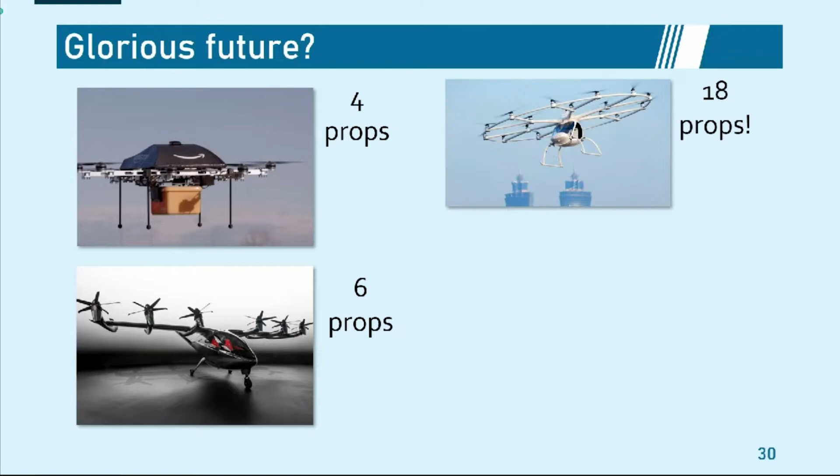And what's crazy is that was just one propeller. Imagine 4 of these on a delivery drone, 6 of these on an air taxi, or 18 of these on an air taxi, or 2 massive sets on a hybrid regional jet. Okay? Excuse the pun, but this is not going to fly.

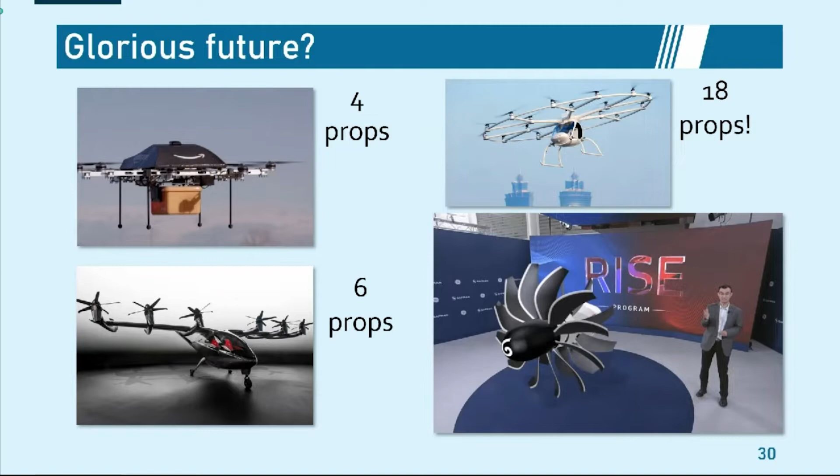People are not going to want these things buzzing over their neighborhoods. The military is not going to want to use them because the enemy will know you're coming from more than a mile away. And this may turn out to be a dud like the Concorde back in the 70s.

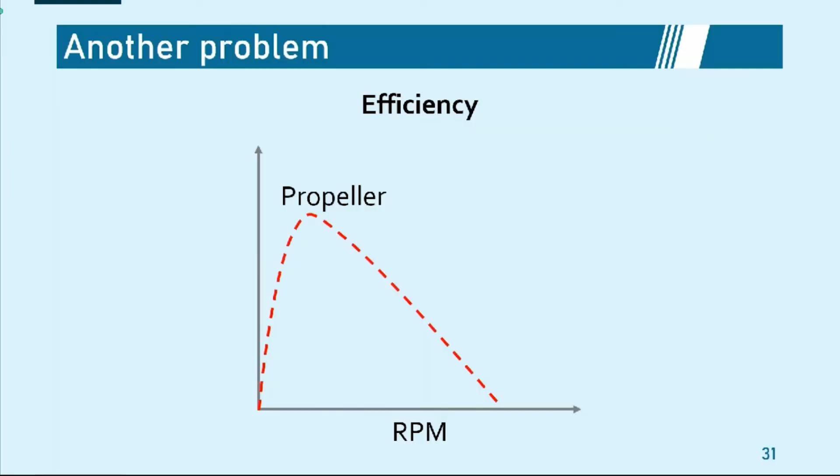Noise isn't the only problem. A propeller's efficiency peaks at low RPMs. At high RPMs, you get that very loud and irritating noise. And that's because the human ear has evolved to be very sensitive to high-frequency sounds like a baby crying or an animal screeching to come get you.

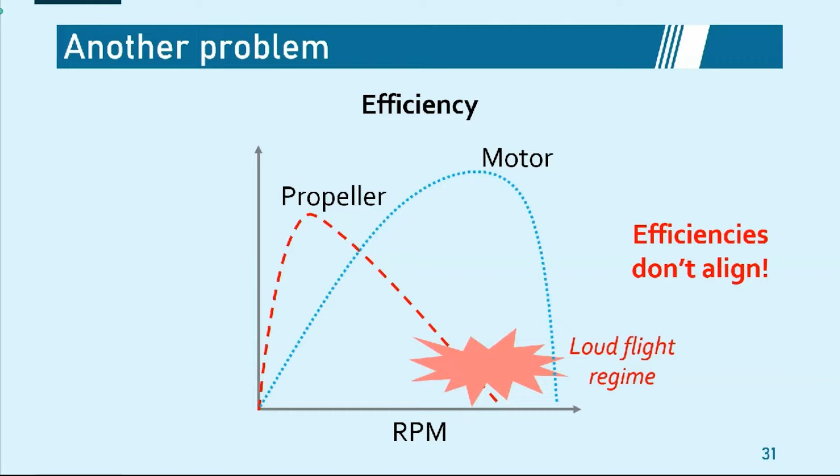Unfortunately, that is where electric motors are most efficient. So the peak efficiencies do not line up. And there's a second kind of double punch. Electric motors are most power dense - they put out the most power per unit weight at high RPMs. So even if you decided to take the efficiency hit and spin everything slowly to be quiet, you would have to massively oversize your motor to get the same amount of power. So it's a double whammy here.

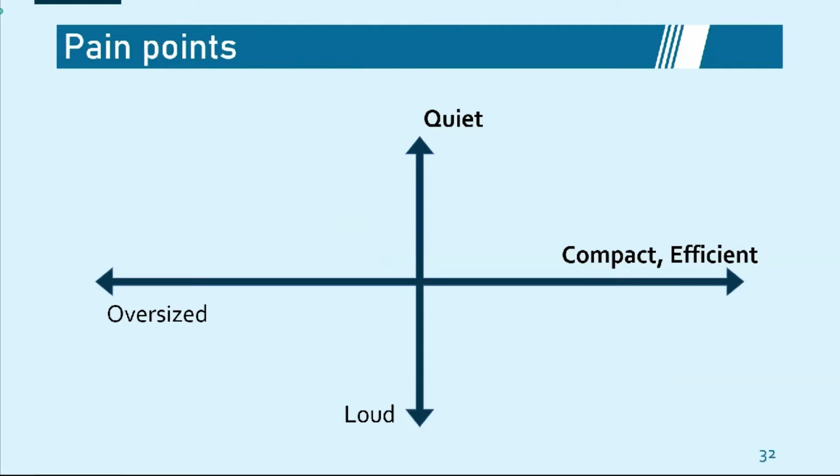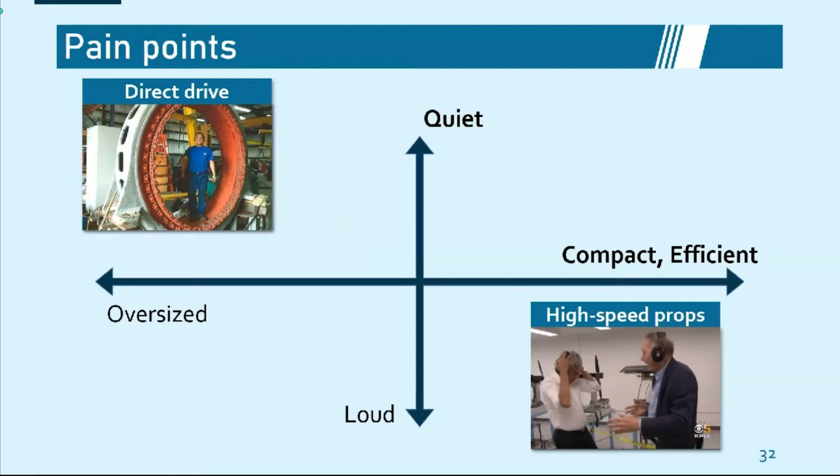So if we're looking at quietness on one axis and compactness and efficiency on the other - if you want it to be really quiet, you're going to have to suffer massive motors, and your plane may not even get off the ground. If you want to be compact and efficient, at least on the electric side, you're going to have to suffer high-speed propellers, like we just heard. If you throw in mechanical gears, you can be somewhere in the middle, but then you have an entirely new set of problems in terms of vibration and maintenance.

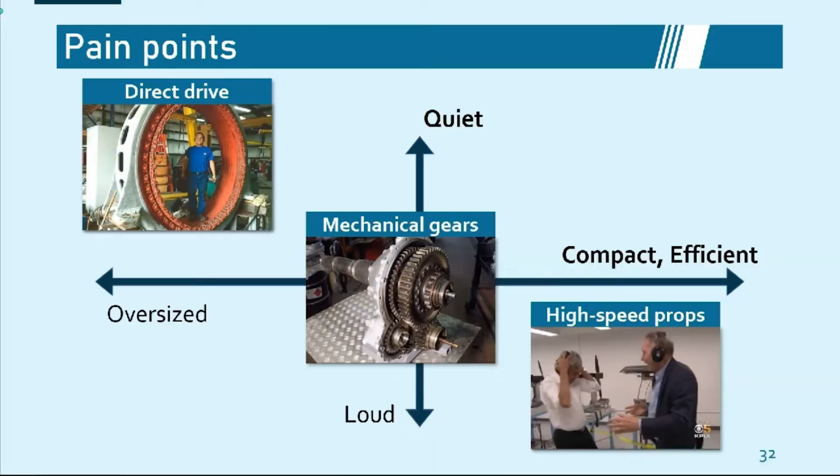So what are you going to do? You're going to buy Harmony's silent drive propellers, that's what, okay? The silent drive is an integrated propulsor that contains a quiet propeller, an innovative magnetic gear system, an electric motor, a motor controller, and a thermal management system to keep it all cool.

What does it do? It aligns those efficiency curves that I talked about at the peak operating point, all while avoiding that loud flight regime that we heard. And we're maintaining the compactness of a high-speed system with the reliability of a direct drive system. And it's an all-in-one system that you can slap onto a drone, an air taxi, or an even larger hybrid regional jet.

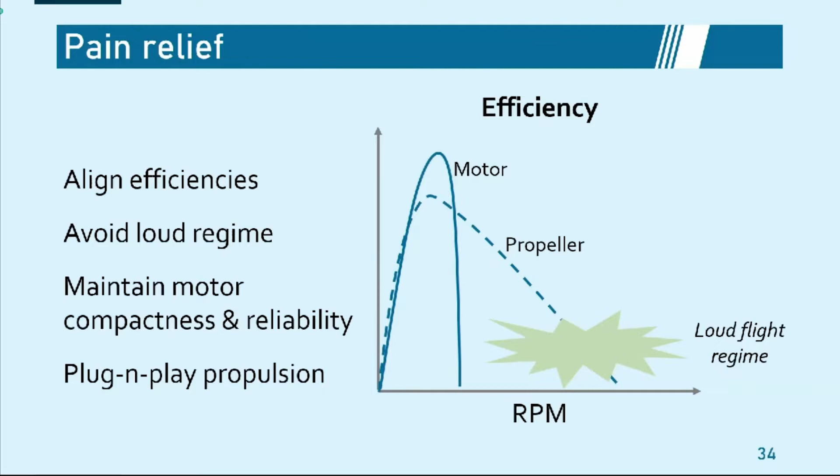What does that mean for the end user, for the customer?

An air taxi equipped with this will not wake up the neighbors when you fly in. It won't wake up your kids. A military system equipped with this technology will not alert the enemy that you're coming.

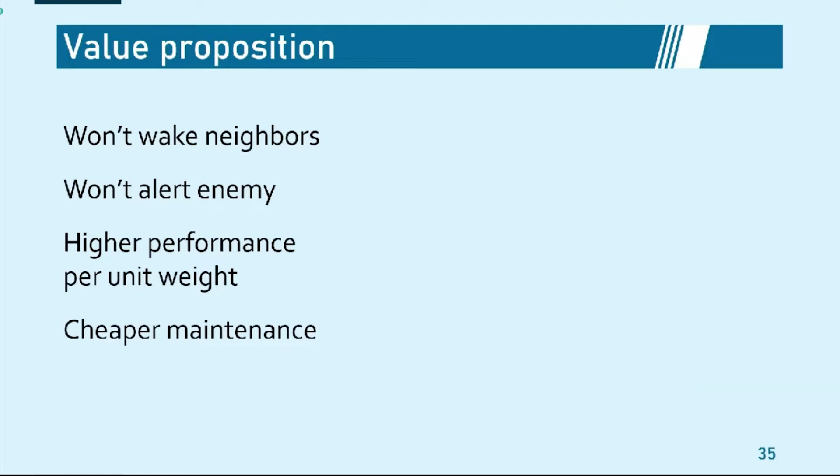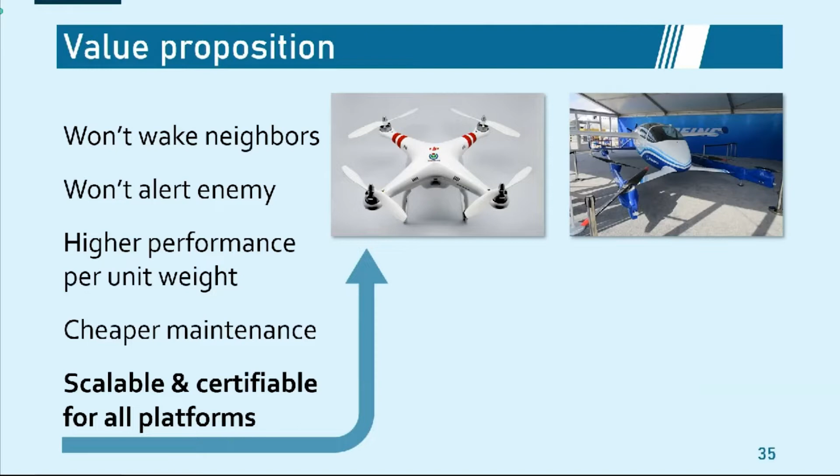We're squeezing more power per unit weight, which translates into longer range and higher endurance. And we're minimizing maintenance requirements while maximizing reliability, which translates into lower operating costs and a cheaper ticket for the consumer. What's great is that this is a scalable and certifiable solution for drones, air taxis, and even hybrid regional jets. How does some of this work?

First off, we have the quiet propeller. We've patented a very unique design with some special sauce that I can't really talk about. But what I can do is demonstrate the quietness.

First I'm going to play a clip of just a standard quadcopter drone that you may buy at Best Buy. And then I'm going to play a clip of our system equipped on a similarly sized drone.

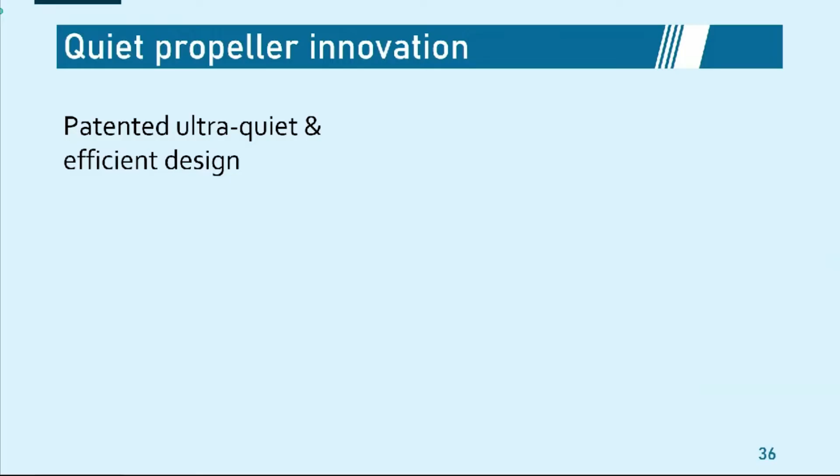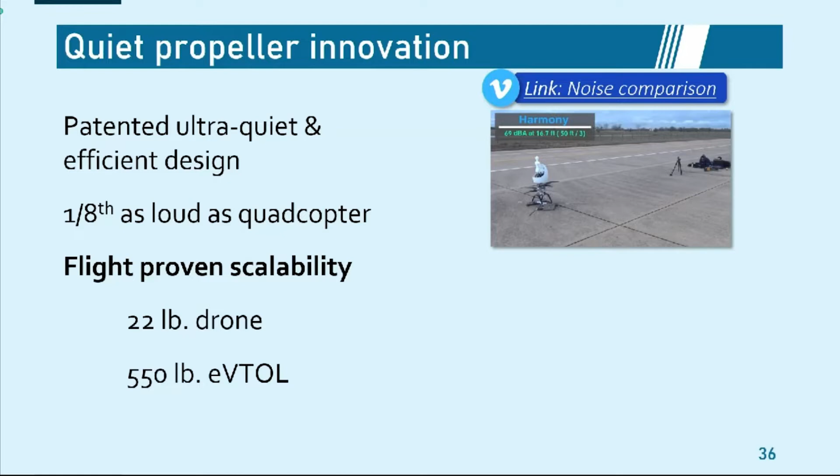It's a heck of a lot quieter. In fact, it's 1/8 as loud as the quadcopter we just heard. And this isn't just some tinker toy that works in the lab on Tuesdays when the stars align. We have flown this technology at a small scale, a 22-pound drone, as well as a large scale, a 550-pound eVTOL system. So I'll play you a clip now.

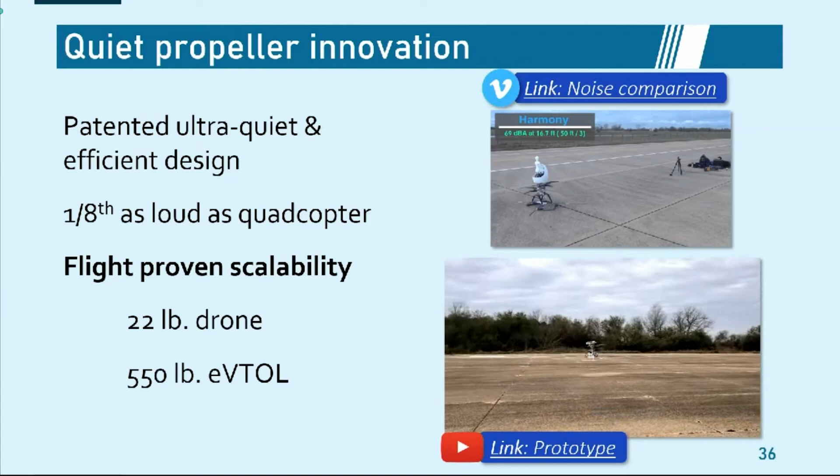If you didn't catch the blurb in that video, the full-scale system was 73 decibels at 50 feet. Google's Heaviside aircraft, which is similarly sized, put out more than 80 decibels at 150 feet. So we're not just quieter than the competition, we're quieter even when you measure our noise at a closer distance, which is pretty cool.

Now let me talk a little bit about the magnetic gear and electrical innovations that we have. We at Harmony have partnered with a fellow A&M startup called Fluxworks, run by some very talented electrical engineers, and they've come up with some very efficient magnetic gear topologies. When I mean efficient, I really mean efficient.

99% efficiency at rated load, all while creating zero backlash and no contact between the gears. It's all magnetic. So intuitively, that makes sense that you will have higher reliability and lower maintenance costs.

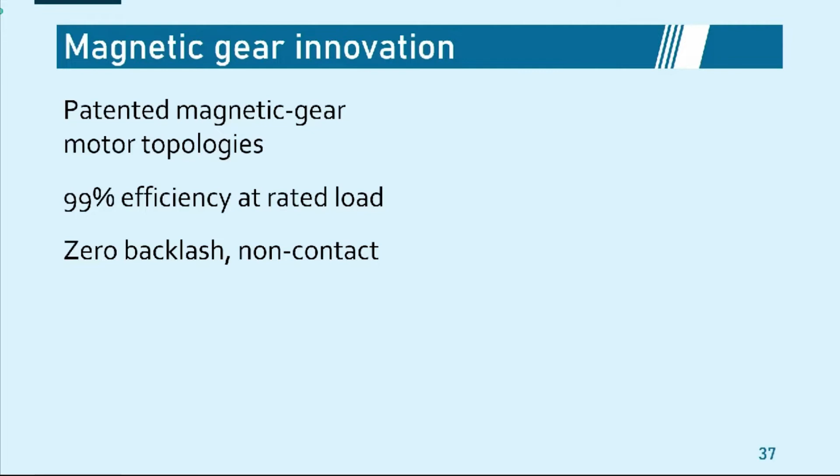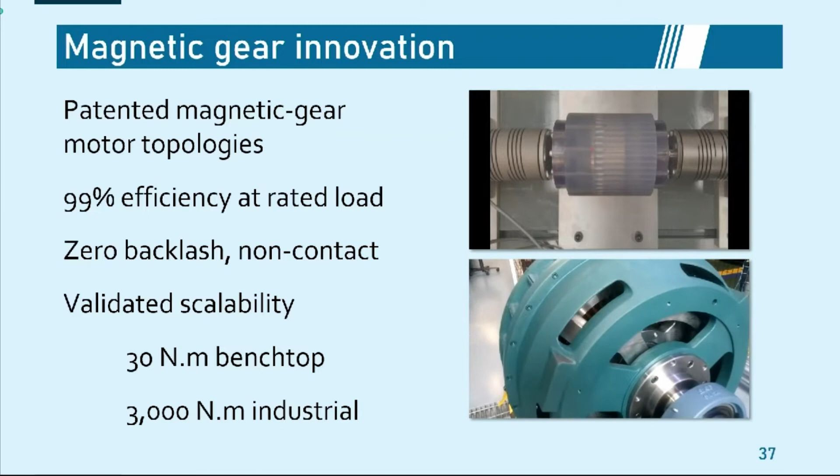How do we want to turn this into a business? We would like to develop a product line of certifiable propulsors for first drones, then air taxis, and then hybrid jets. We think this is a good idea because we already have all the right stakeholders knocking at our door.

Established companies like Boeing and Sikorsky are interested in our technology, as well as new eVTOL aerospace startups like Beta Technologies. And we have interest and development contracts from government stakeholders like NASA and the Air Force. Not to mention, there's a lot of spin-off potential for on-the-ground terrestrial applications like quiet fans and compact generators for consumer and industrial settings.

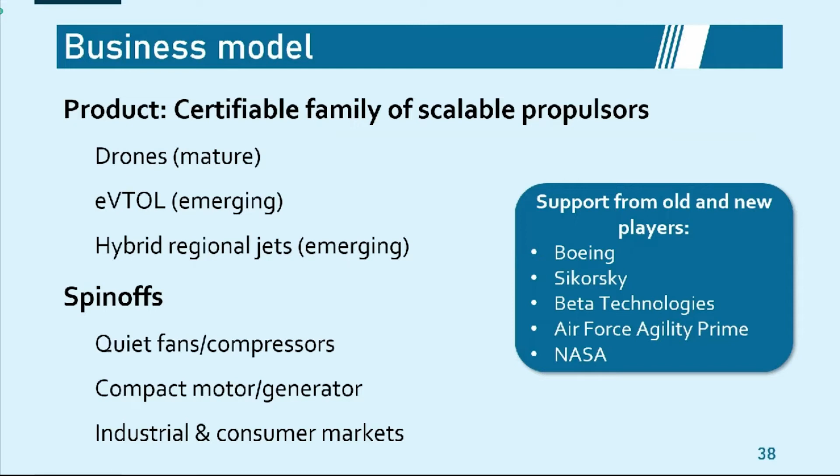We would like to take advantage of NASA's upcoming SUSAN program. It's a tech demonstration program that should start in 2022. That serves as a non-dilutive funding opportunity for us to develop and flight test a propulsor for large drones or maybe even small air taxis.

The great thing about going to the drone market first is that it's unregulated, so we don't have to certify the propulsor. We can just go straight to market and start generating revenue by early 2024. After that, if we would like to certify an air taxi propulsor, we can take advantage of the Air Force's Agility Prime program.

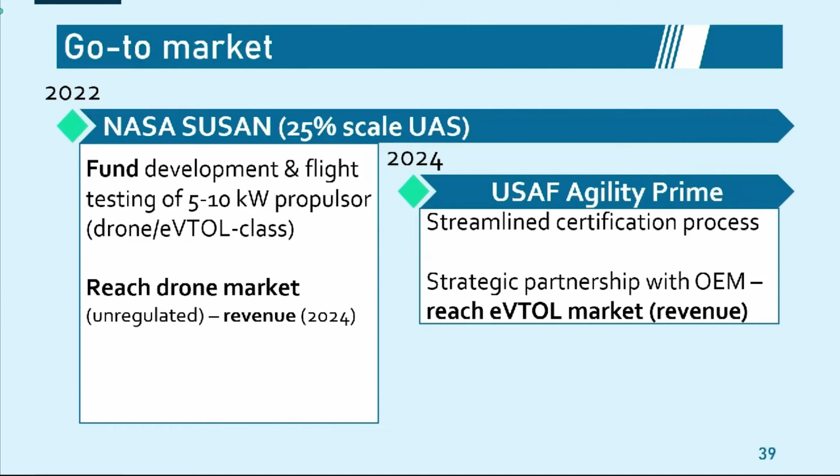They've streamlined the certification process, and if we can leverage our interest with big players like Boeing into a strategic certification partnership, we can reach the eVTOL market and start generating revenue with reduced costs and reduced risk. Later on, we can come back to SUSAN and take advantage of another non-dilutive funding opportunity to develop a hybrid jet propulsor. That would be its own certification campaign, and also leverage revenue from spin-offs like sub-licensing to terrestrial applications. So not a pie-in-the-sky research project, quite literally.

Who are our competitors? Some of you may have heard of Whisper Aeronautics. They're a similar company to us, trying to look at quiet propulsion for eVTOL. But as far as we know, they're just looking at the propeller, and they don't have anything flying yet, unlike us. Some of you may have heard of H3X Technologies. They're trying to develop a power-dense electric motor for aviation, but they're just looking at the motor side, and they're looking at 11 kilowatts per kilogram.

We at Harmony and our partners at Fluxworks are looking at the entire picture, an integrated propulsor that can put out up to 13 kilowatts per kilogram. So we've got them beat.

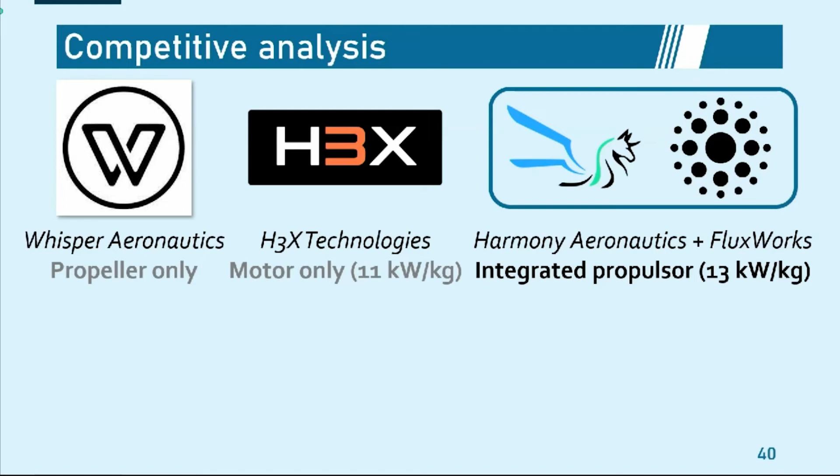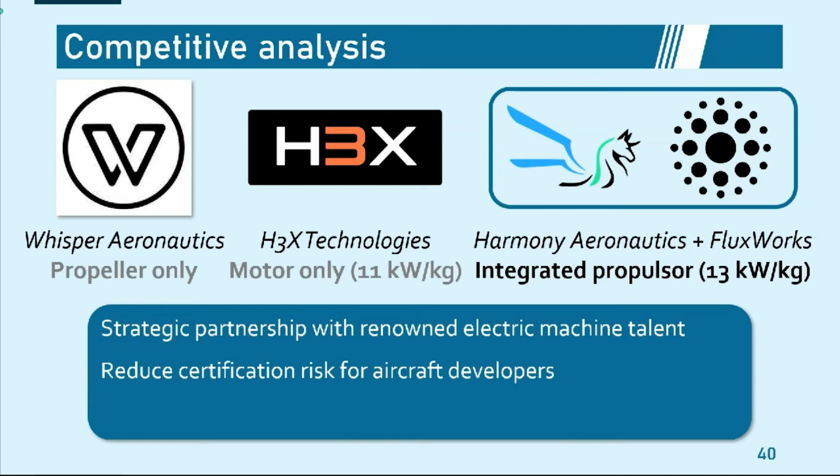We're very confident that we can beat the competition because we have great aerospace and electric talent under our umbrella. What we're offering is very compelling to airframe manufacturers. We're taking this very complex piece of equipment, the propulsion system, and letting the airframe manufacturer worry about designing the airframe, while a plug-and-play propulsion solution exists for them. And we're flight-proven. What more can you ask for?

Our leadership team at Harmony includes myself and our CEO, Dr. Moble Benedict. He is a world-renowned rotorcraft expert. Our partners at Fluxworks include Bryton Praslicka, who's with me in the audience today, as well as Dr. Hamid Toliyat, a world expert in electric motors. And we're being advised by some very successful experts and mentors in the defense, tech, and venture capital world. So we're confident we can develop our startup into a proper business.

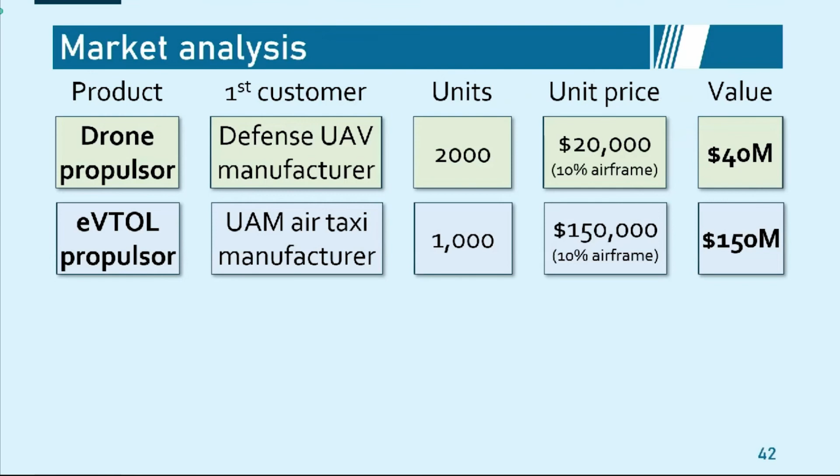Talking about the market again, the first product we would like to develop is a propulsor for drones. Our target customer would be a UAV manufacturer for the Defense Department. Those guys have to buy American, build American, so that's a foot in the door for us. With 2,000 units at a unit price of $20,000 per propulsor, we're looking at a market value of $40 million. After that, we would tackle the eVTOL or air taxi market, and our target customer there would be an air taxi manufacturer. With 1,000 units at $150,000 each, we're looking at a market value of $150 million.

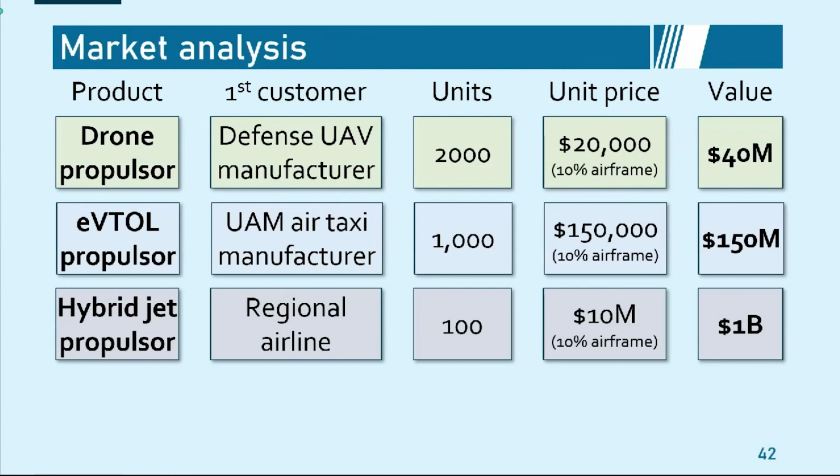Finally, we would tackle the hybrid jet market. Our target customer there would be a regional airline. With 100 units at $10 million each, we're looking at a market value of $1 billion. Not to mention, we have those spin-off opportunities, like I mentioned. So we can sub-license some of our innovations for flight control actuators, wind turbines, and other industrial machinery on the ground.

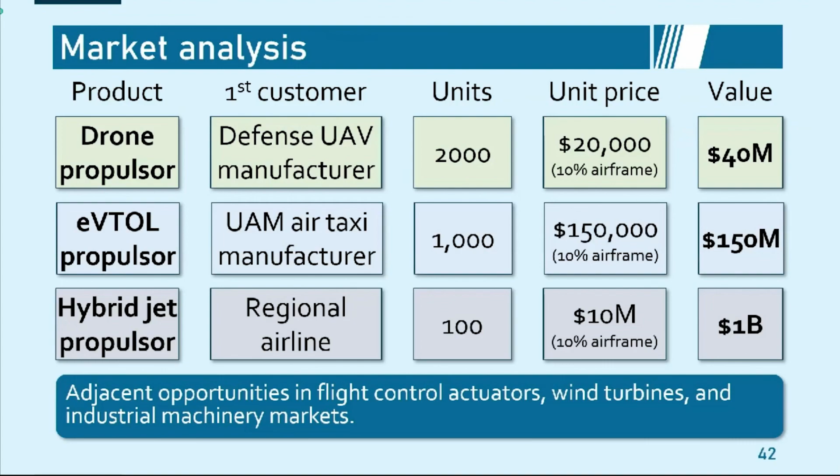Just to give you a quick summary of our company: we started back in 2018, and in the span of a year and a half and $300,000, we designed, built, and flight tested a TRL-6 prototype. That was the aircraft, the full-scale aircraft that I showed you earlier.

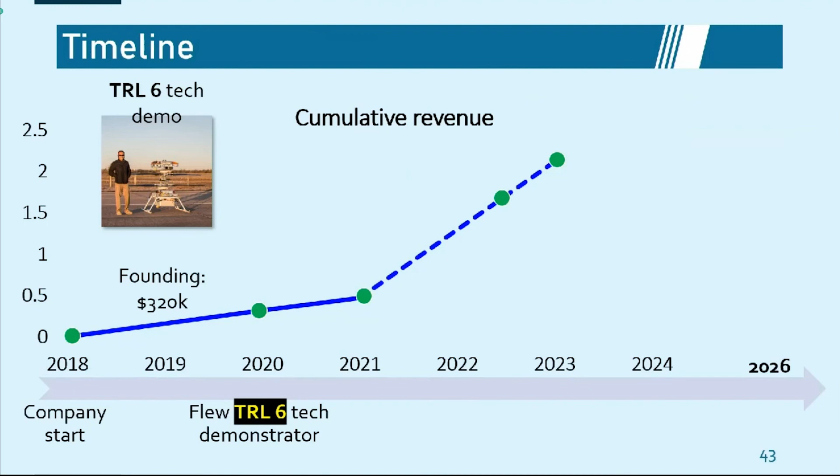We just wrapped up phase 1 of an Air Force STTR, and our goal now is to further increase the TRL of our technology. So we're waiting to hear back on phase 2 of that Air Force contract. If the Air Force is watching, please let us know. We'd like to increase the TRL of that prototype up to TRL 9 in phase 2.

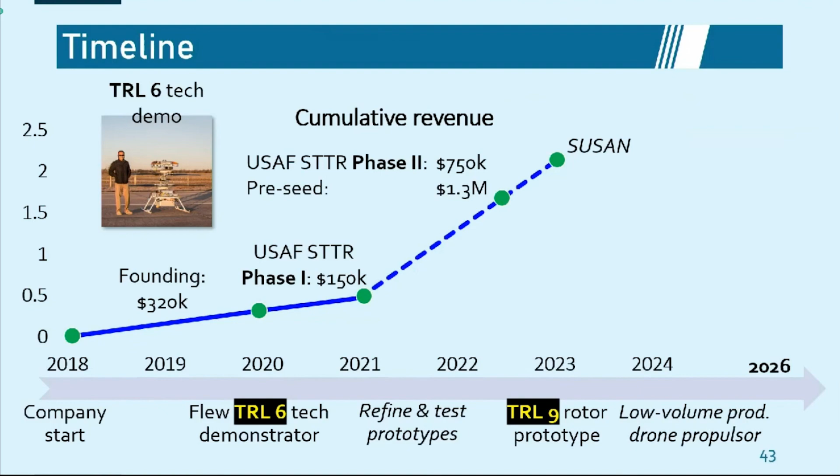And then after that, we'd very much like to develop this propulsor through the SUSAN program. With that, I'll wrap it up and open it up to questions. Thank you for your time.